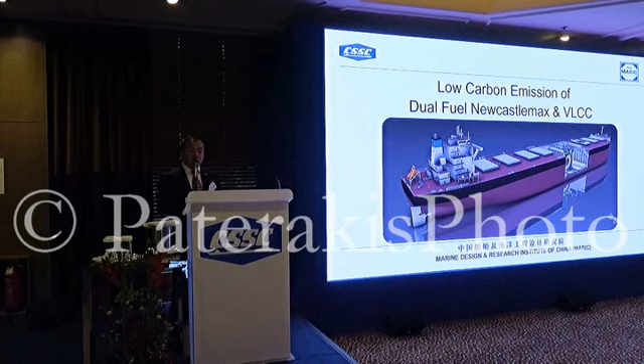Ladies and gentlemen, good evening. My name is Li Xiaoping from MARIC, subsidiary to CSSC Group. It's my pleasure to attend the CSSC reception party. I will make a presentation of new dual fuel Newcastlemax bulk carrier and VLCC we have developed.

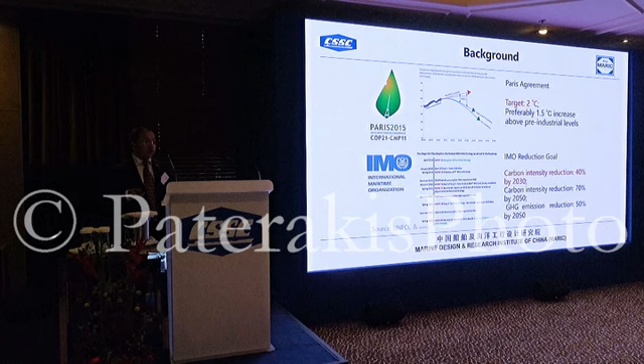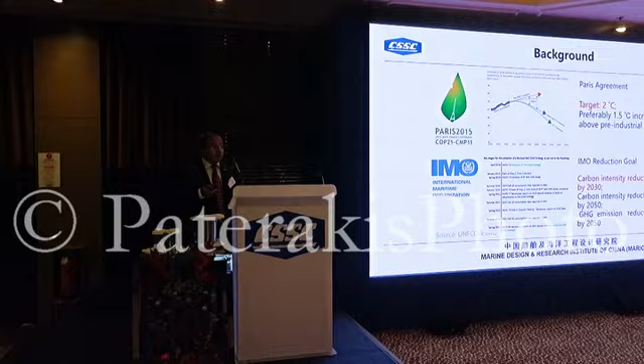I will make an introduction covering the following 5 items. First, background. As you know, the Paris Agreement requires controlling temperature increase to less than 2 degrees. IMO is always positive to reduce greenhouse gas emissions to meet the Paris Agreement. So IMO's reduction goal is: by 2030, carbon intensity reduction of 40%, but by 2050, about 70%.

Different ships have different requirements. For container vessels, MARPOL MEPC 74 has issued more stringent CO2 emission requirements for container vessels, with different requirements for different deadweights. For large bulk carriers, we are facing a greater technology challenge to meet phase 3.

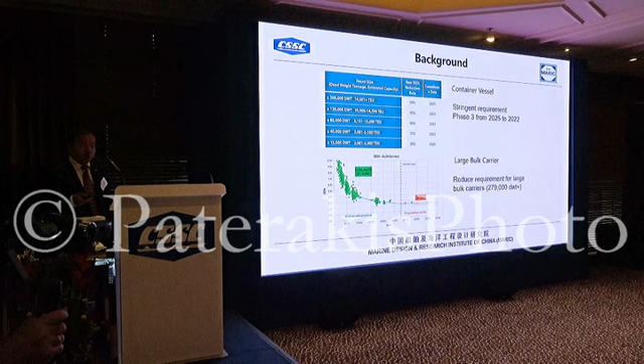For decarbonization, we have 3 solutions: normally including the existing hull and propulsion efficiency solution, and another 2 potential solutions. For hull and propulsion efficiency solutions, most technology has been used, such as line optimization, energy saving devices, and main engine derating. Some new technology is still under development, for example air bubbling lubrication.

For alternative energy, for example wind energy, the system efficiency depends on the route. But large bulk carriers don't always have a fixed route, so wind efficiency is not stable. For alternative fuel, I think in the short term LNG is a practical and effective solution to meet requirement phase 3. For other fuels like biofuel, hydrogen, and ammonia, they may be future solutions to reduce carbon directly, but they are still under test and study.

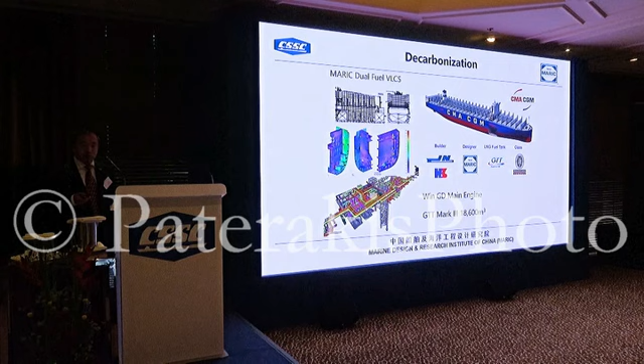So for dual fuel vessel, MARIC already designed the largest dual fuel container vessel for CMA, 22,000 TEU container vessel. This vessel is under construction in Jiangnan and Hudong-Zhonghua from CSSC Group. So we use the WinGD main engine with a low pressure system.

And also the LNG tank is GTT Mark 3 type with a capacity of 18,600 cubic meters, located in the fore part of the vessel on the accommodation block. So there are many challenges in technology design, such as tank flow sloshing and reinforcement, and also long pipe diversion control, and so on. So now we have finished the detailed design, and construction is progressing smoothly.

And first vessel will be launching at the end of this month. So next I will speak some words about dual fuel Newcastlemax bulk carrier. Until now, we had already designed 2 generations of Newcastlemax bulk carrier. Up to now, the orders are more than 60, so good record in the market.

So we have applied energy saving solutions as far as possible to reduce fuel consumption, such as hull line optimization, propeller efficiency, ESD, and lightweight control. The final verified EEDI value is 23% below baseline.

So in order to meet phase 3 requirements, we have 3 possible solutions. Option A, main engine derating, maybe the simplest way, but the vessel will not have enough power to maintain maneuverability in harsh seas.

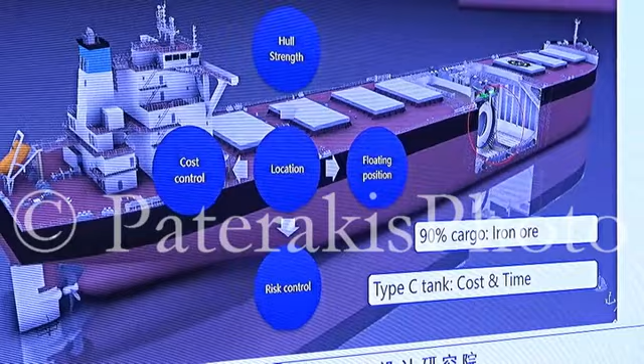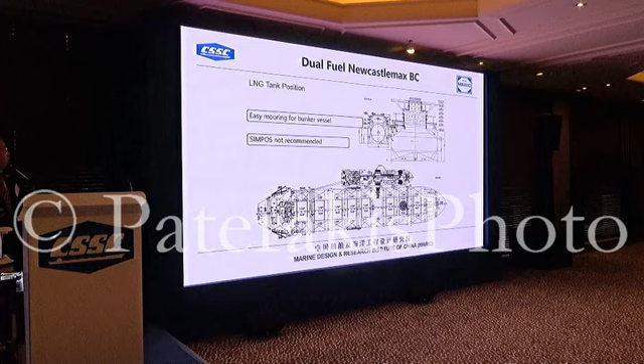So for LNG tank position, we consider the tank located in the middle part. It's easy for mooring with the bunker vessel, but simultaneous operation is not recommended, especially for offloading, due to high risk.

So until now we have finished the first stage design, and we got 4 class AIP, including Lloyd's, BV, DNV GL, and also ABS. So now we are doing the hazard risk analysis with BV. This will finish at the end of next month.

So for gas system design, we have performed fuel gas supply system design and arrangement optimization focused on safety and cost. All the fuel gas system will be located above the LNG tank, with the vent mast in the fore part of the vessel, both far away from the engine room and accommodation block. So the risk will be reduced to a safe, lower level.

So we also have done some preliminary CAPEX analysis based on the low pressure system and Type C tank. The total initial cost increased, including the dual fuel engine, the generator, the gas handling system, and LNG tank, and also steel weight increased. The total initial cost increase is about $13.7 million.

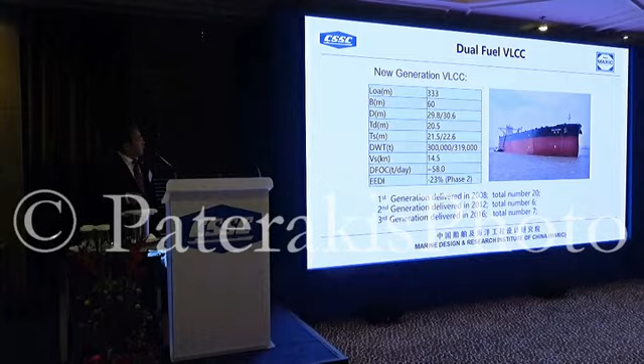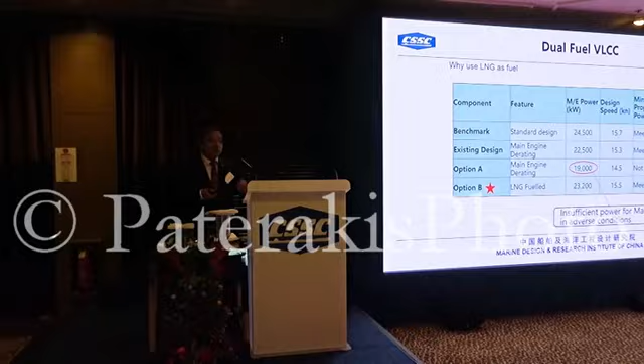So next, I'd like to speak some words for dual fuel VLCC we have developed. Until now, MARIC had designed 3 generations of VLCC, and we have 30 orders. Low fuel oil consumption and especially max cargo capacity with low EEDI, by fully optimized hull structure and strength analysis. So in order to meet phase 3 for VLCC, why use LNG as fuel? If more main engine derating, that will also cause insufficient power for maneuverability in harsh weather. So I think that until now, LNG is so far a good solution to meet EEDI phase 3.

So this is a typical route of VLCC. For example, from Middle East to China, according to our calculation, the 7,000 cubic tank is enough. Another typical one, from West Africa to China, is a 9,000 capacity. If you consider to cover all the typical routes from USA to China, the tank capacity will be 14,000 cubic meters.

And so all design considers covering USA to Middle East. So we have 3 solutions. The tank capacity is 11,000 cubic meters. For solution 1, we use 2 Type C tanks located on the main deck. For solution 2 and solution 3, Type B tank and Mark 3 type, we will locate in the cargo area.

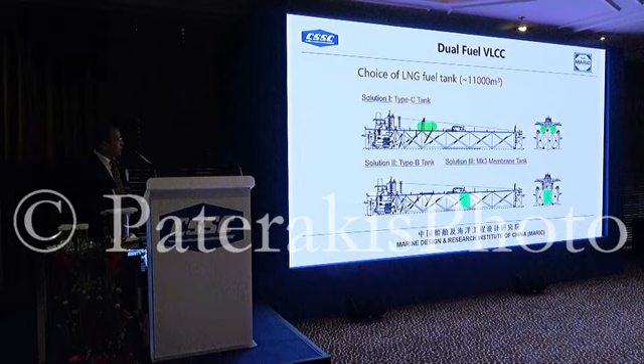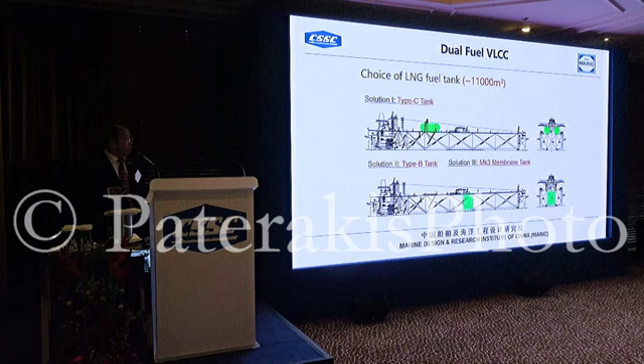So the initial rest analysis is almost the same as Newcastle max bulk carrier. However, due to its higher fuel oil consumption, the required oil gas price gap will be smaller than the Newcastle max bulk carrier.

So we have done some preliminary comparison analysis. For solution 1, cargo hold loss, no cargo loss. Solution 2 and solution 3 will cost about 14,000 cubic cargo tank capacity loss. Some owners prefer a Type C tank on the main deck, and other owners insist LNG tank is more safe to be located below the main deck, and they don't care about such cargo hold capacity loss. So we can provide all 3 solutions for different owners' proposals.

The dual fuel is so far a good solution to meet phase 3 requirements. And MARIC, we have much more experience in dual fuel design, for example like container vessels. So I would like to be your preferred partner. That's all my presentation. Thank you for your attention.

Thank you, Mr. Lee. Good friend. So CSSC, good friend here.

I'm from SDARI. So today I give a presentation on our design towards 2030. 2030 is still far away, but as Mr. Lee mentioned, our shipment is very busy and very brave. As a partner in such shipping industry, SDARI is busy with R&D, and we are brave enough to face the future problems.

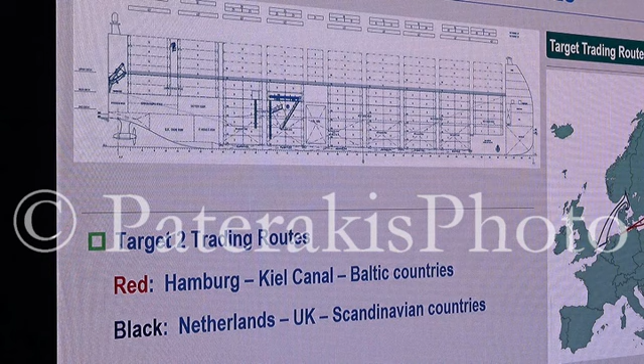Actually, this is a zero emission feeder, but with some technology of direct current bus technology. Yeah, we are very flexible to combine different electric power from various resources.

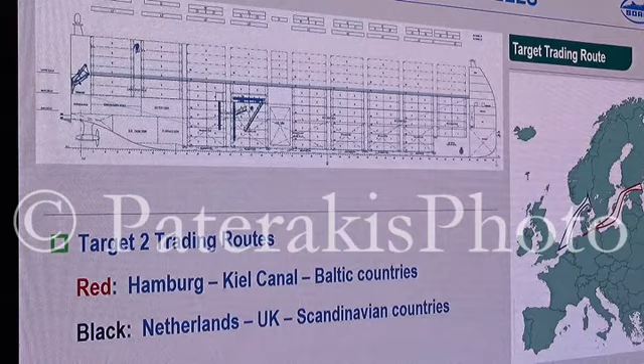Our target is for two trading routes. First one is from Hamburg, Kiel Canal, then to Baltic countries. The black line is for Netherlands, UK, Scandinavian countries.

For the coastal or domestic operation, we think recharging of the battery and the hydrogen would be much easier. We have the liquefied hydrogen tank, we have the fuel cell module, and we have the fixed battery.

But to make this design more flexible, we can use the containerized battery. Then you can define your own shape as you like, how much power from the containerized battery.

And with direct current bus to main switchboard, we can combine these power suppliers, and simultaneously we can even take into account a supercapacitor to enhance the capability of increasing or decreasing speed in very short time.

So we can connect to shore power to recharge our battery. Also, we have the bunker station for liquefied hydrogen.

This is some data, but anyhow, that can be very tailor-made for you. The battery is 2 megawatt hours, so 2 sets.

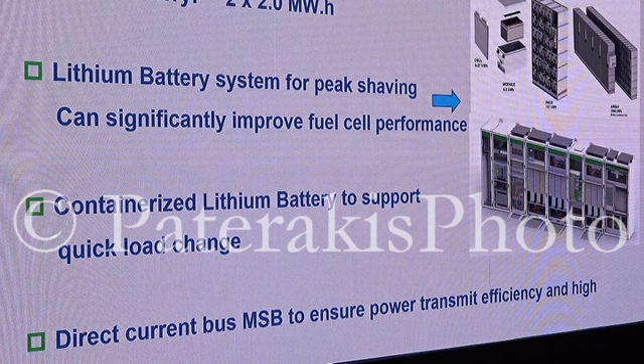Thanks to Mr. Zhou for making a very modern and future design. And then you can find we have 2 design institutes. They have two types of consideration, and also we not only have the design institute, we are a shipbuilding group.

So we have a shipyard. Each shipyard has its own design institute. They also have their own considerations. So we use this time to let them present their design to you.

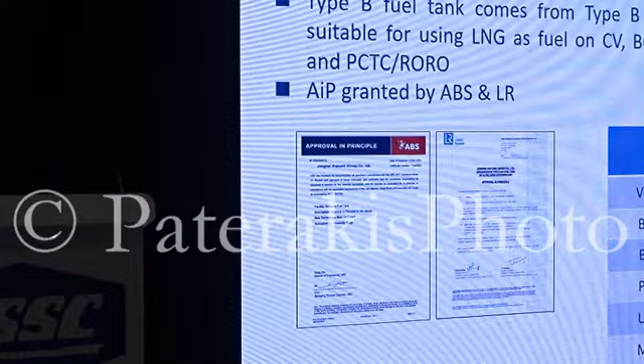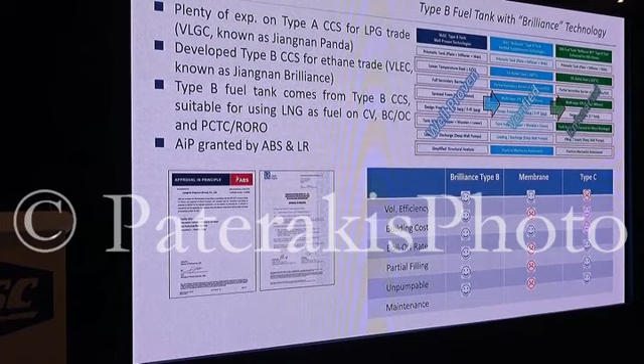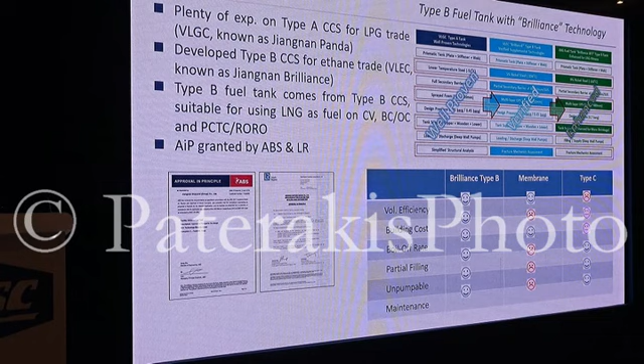This is the first product, the Type B fuel tank for LNG powered ships. In the recent 3 years, we have developed a very large ethane carrier for the market demand on ethane trade from the US to the Far East. The vessel is fitted with Jiangnan-developed brand-new Type B cargo tanks, based on our experience with VLGC Type A tanks. To face the carbon emission challenge, we enhanced the tank design and made it suitable to carry LNG. We call it Type B fuel tank with brand-new technology, or BFT.

Now the BFT is principally approved by ABS and LR. Compared with Type C tank, fuel tank, and membrane fuel tank, BFT has big advantages in volume efficiency, new building cost, BOR control, partial filling, LNG unloading, and maintenance, which make it a better solution to be applied on container ships, bulk carriers, ore carriers, PCTC, and so forth.

This is the application of BFT on a mega container vessel. It's a joint project between Marika and Jiangnan. The fuel tank is located below the accommodation island with a capacity of 18,000 cubic meters. By introducing BFT and LNG as fuel, the ship's carbon emission is reduced by 60%, predicted to comply with EEDI Phase 4.

Another application of BFT is on a Newcastle-Max bulk carrier. The fuel tank is inserted into the hull between number 5 and number 6 cargo hold, with a capacity of about 6,400 cubic meters. Compared with the conventional oil fuel design, the ship will have about 10,000 cubic meters less cargo hold volume and about 1,000 tons less deadweight. However, the carbon emission is far less than the oil fuel version. The carbon reduction is about 38% compared with EEDI Phase 3.

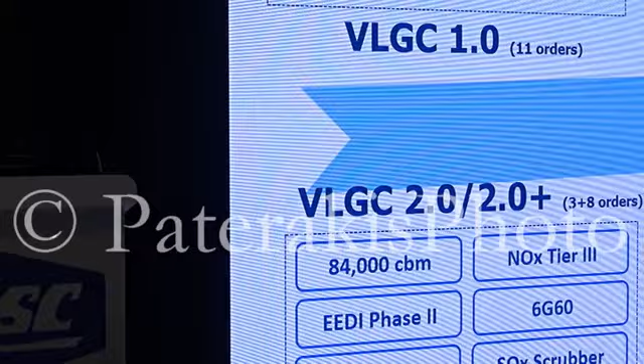VLGC4 is under development now, and its capacity is enlarged to 90K or even 91K. However, LPG as fuel is not strong enough to support the vessel to comply with EEDI Phase 4, so we introduced an air lubrication system to further improve energy efficiency and reduce carbon emission.

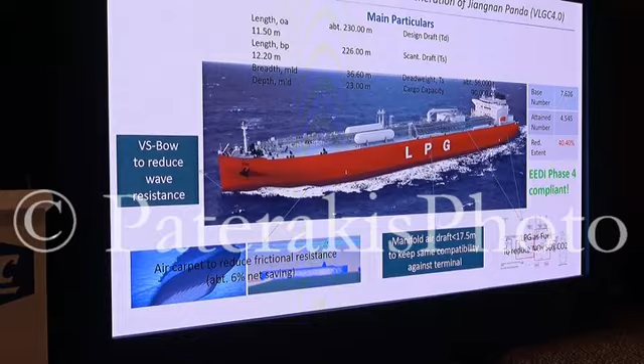Here are the main features of the VLGC4. The main particulars are almost the same as the normal VLGC. A VS-Bow design is applied to reduce wave resistance.

At the forward part of the flat bottom, several air bubble generators will be installed. By using the air lubrication system, we can get about 6% net saving on propulsion power.

The manifold height will be less than 17.5 meters above the water line to keep the same compatibility. LPG as fuel will be adopted, same as VLGC3. Besides bigger capacity and same compatibility, the carbon reduction is about 40%, predicted to comply with EEDI Phase 4.

Okay, that's all for my presentation. Thank you.

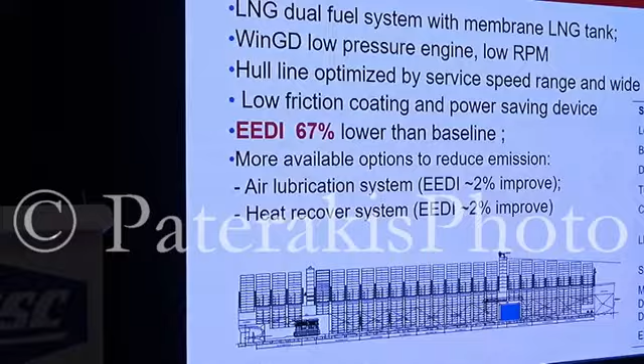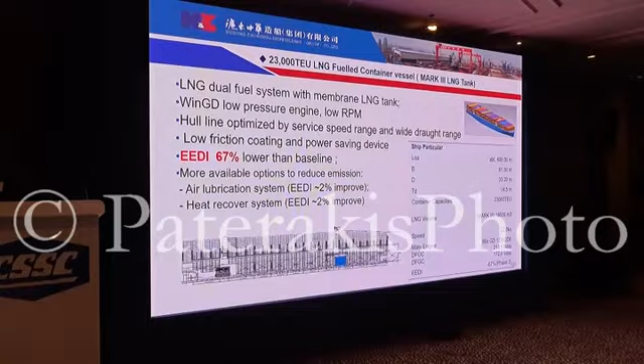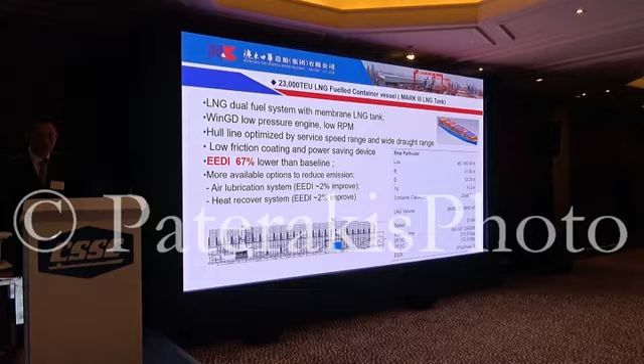Another vessel is the 23,000 TEU dual-fueled container vessel. This is equipped with Mark 3, same as the CMA CGM. We are already under construction. Same, we equipped with low pressure engines and low RPM, and the ship was optimized around the service speed, and the draft is a different rate, and the low friction coating is the same. So for this vessel, the EEDI could be 67% lower than the baseline.

Also, we have some options, same as I just mentioned. So this newly developed container vessel - we think if shipowners place orders before 2030, this is quite a good solution. So that's my presentation. Thank you.

Hudong Shipyard is one of the successes for the LNG carrier, and they also have a lot of experience related to LNG. But they focus on big container vessels and big LNG carriers. Now there's another shipyard here. So we invited Mr. Kwai from SWS.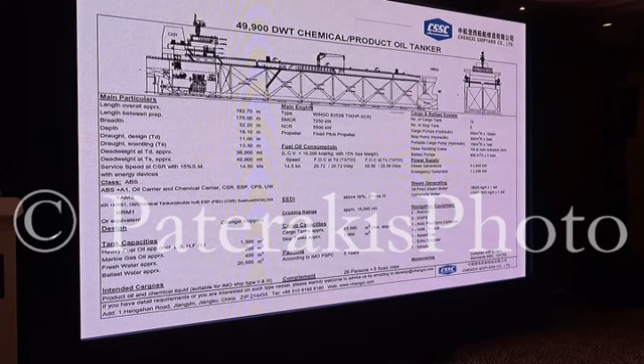The type of ships we build, everybody who knows CSSC understands we are more specialized on the bulk carrier side. I made a calculation: overall we have delivered a total of 230 ships, and out of these, 85% of the 230 ships are bulk carrier ships.

I can give you some calculations. For the Diamond 53 ships, we have delivered a total of 63 ships. For the Dolphin 64, we delivered another 63. For Kamsarmax 82 and 85, we have a total contract of 32 ships, and we've got 20 ships already delivered.

The rest of the ships we constructed are on the niche market. First of all, I'd like to mention the self-unloading ships. This technology and experience was really improved by CSSC itself, thanks to our ship repair and conversion capability. We have delivered more than 12 new building self-unloading ships, and we have also delivered 7 pitch carriers, and presently we've got another 8 wood chip carriers under construction.

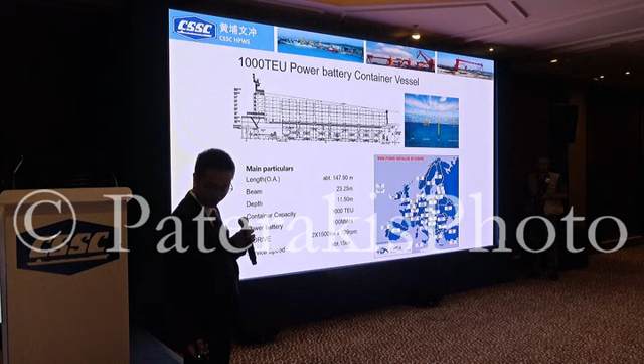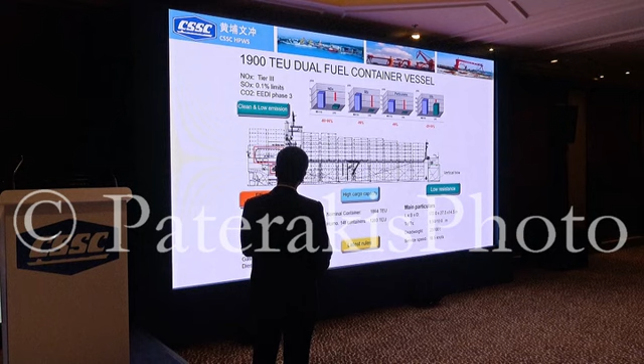We have the tanks behind the bridge. The capacity of the tanks is 900 cubic meters, which is possible for 9 days.

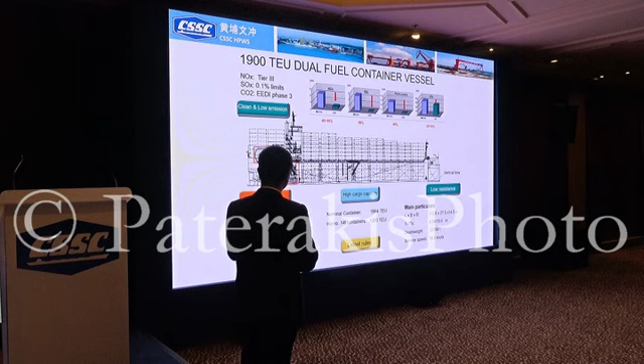The fuel consumption for the gas motor is 31.7 tons. For the diesel motor, it's 39 tons per day.

I think the focus for the owner is to reduce fuel consumption. Also it's very important to have high cargo capacity. For this size, 14 ton containers, 1,260 containers is possible.

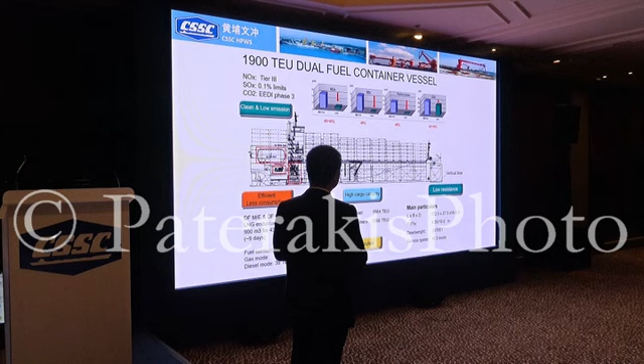The bow design is a vertical bow, so it has low resistance.

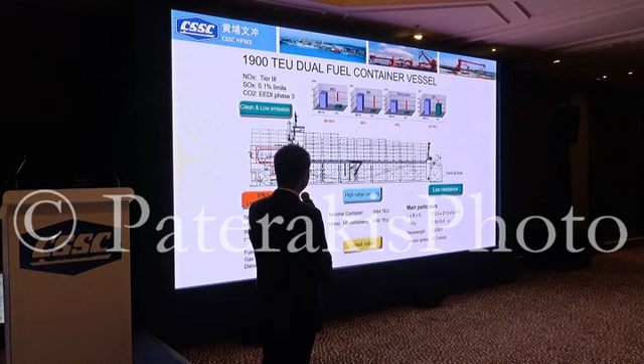A lot of shipyards have mentioned the year 2030. All the yards, including us, have discussed with a lot of owners who are very interested to find a solution. Dual fuel is one way to meet the big challenges for 2030. I think this is one way, because we have delivered a ship. Now the ship is operating in broad sea and the owner is very satisfied.

So we have another option for 2030. Another way, as I mentioned, many yards think we can use LNG as fuel. Another way is to reduce our speed and take more containers. This is another way. So we have our new design.

It's the Blue Whale container vessel. We will take more containers at low speed. The service speed is 18.3 knots, and it can take 14-ton containers, 2,600 TEU.

We think these ships are also good for the challenges of 2030. We have designed these ships according to the new rules. Second is less fuel consumption, also low resistance hull. Third is high cargo intake, 83% for 14-ton containers loading load.

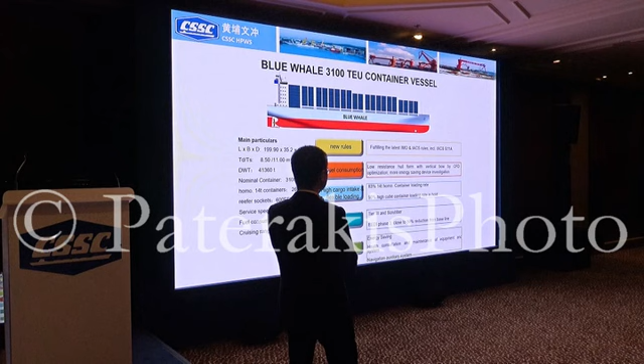So clean, it's Tier 3 and scrubber. EEDI phase 3, close to 50% reduction from the baseline. Also smart, so energy saving.

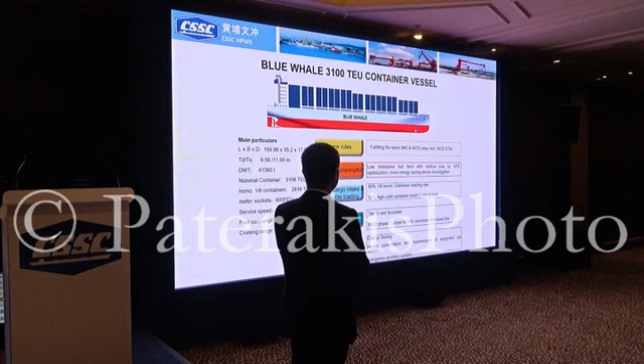For future container ships, we also think it must be smart. The year before last, we delivered the first smart ship to the market. For this ship, we also got the AIP from DNV. So I think it's possible to build it immediately.

For the future, we are thinking not only about 2030, but also 2050. So we have our design for a 1,000 TEU power battery container vessel.

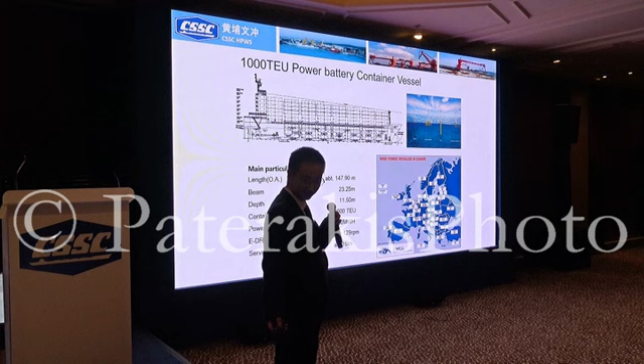We believe this ship is zero emission. Also the power battery supplies all the loads of the vessel: power safety, smart power control system, and a new fire control system.

I mentioned this battery will be put in different places for safety. Also low cost, since electric charging is lower than fuel oil. Also easy to maintain, because without a diesel engine, it's easier to do repairs. So we believe this ship is the future.

Now electric cars are more popular, so we think this electric vessel will also be very popular by the year 2050.

Another idea is about this. This is the map of Europe. Now, how to charge the power to the electric battery vessel? Our idea is, because now there are a lot of wind farms, it's possible to make a charging station at the wind farm. This is easy for the ship to charge power. This is one way for charging the electric container vessel.

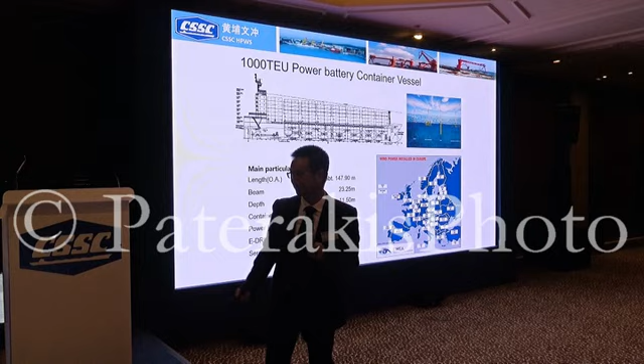Thank you, Mr. Lee. After the presentations from the two design institutes, we have six shipyards making their own designs and considerations. Some are very futuristic, some are very realistic, and some are considered based on their shipyard's view, and some on behalf of the ship owner. I hope these presentations don't confuse the ship owners, and that you will come back to decide how to select the future ship. Today we cannot provide the full design or details, but we provided some ideas to show you. As a CSSC group, we have ship design and shipbuilding, a shipyard, but this is not enough. We also have finance support and a leasing company. So now, welcome Ms. He to make the presentation.

Ladies and gentlemen, good evening. You have been presented by the best institutes and the best shipyards with all their best designs. Now you must be thinking how to make these designs become your true fleet. So we are here. That is why we are here. CSSC Hong Kong Shipping Company is the financial branch of the group, supporting all the projects in the group.